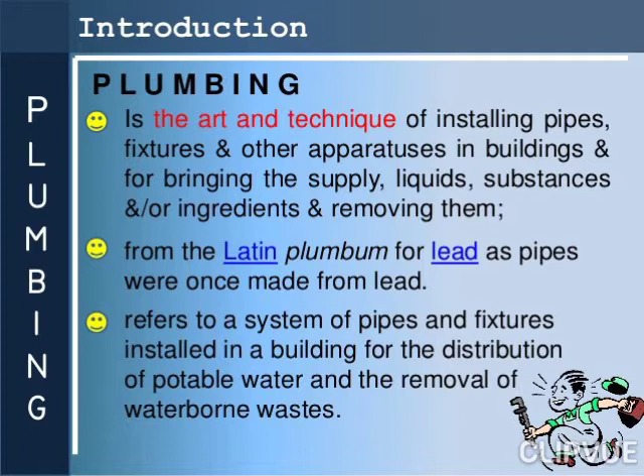From the Latin plumbum, for lead, as pipes were once made from lead, plumbing refers to a system of pipes and fixtures installed in a building for the distribution of potable water and the removal of waterborne wastes.

The plumbing system includes all the potable water supply and distribution pipes, all plumbing fixtures and traps, all sanitary and storm drainage systems, including vent pipes, roof drains, leaders and downspouts, and all building drains and sewers, including their respective joints and connections, devices, receptacles, and appurtenances within the property.

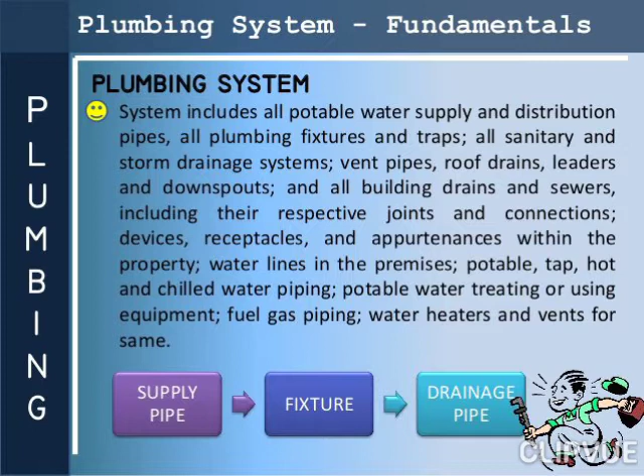Water lines in the premises include potable tap, hot and chilled water piping, potable water treating or using equipment, fuel gas piping, water heaters and vents for the same. So in the block diagram we can see first we need to supply water to the pipe, then it goes to the fixture, and the water will move to the drainage pipe.

Plumbing cycle. Here the supply begins in the water mains and the storage tanks. Distribution occurs through pressure in the piping networks. The use is about the plumbing fixtures. The collection occurs in the gravity piping networks. The disposal occurs in the sanitary and storm sewers.

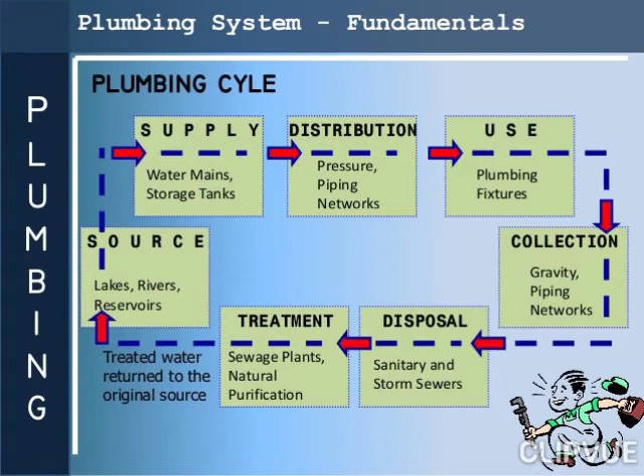The treatment occurs in the sewage plants, natural purification. After that, the treated water is returned to the original source, for example, lakes, rivers, and reservoirs.

Definition: the water supply carries water from the water source, street main, or a pump to the building and to various points in the building at which water is used. Two types of water supply: cold water supply and hot water supply.

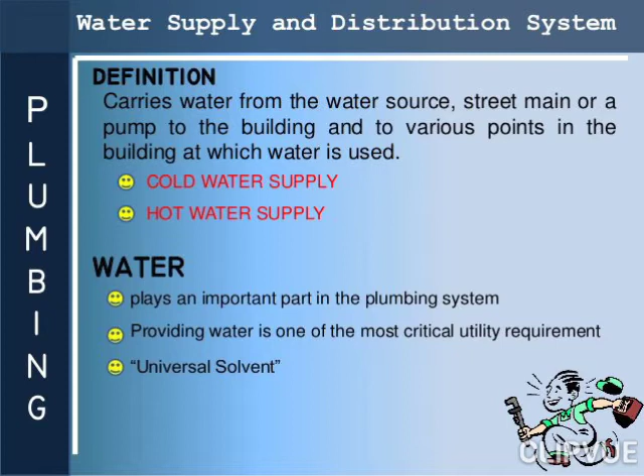Water plays an important part in the plumbing system. Providing water is one of the most critical utility requirements. It is referred to as the universal solvent. The water cycle involves three major stages: evaporation, condensation, and precipitation.

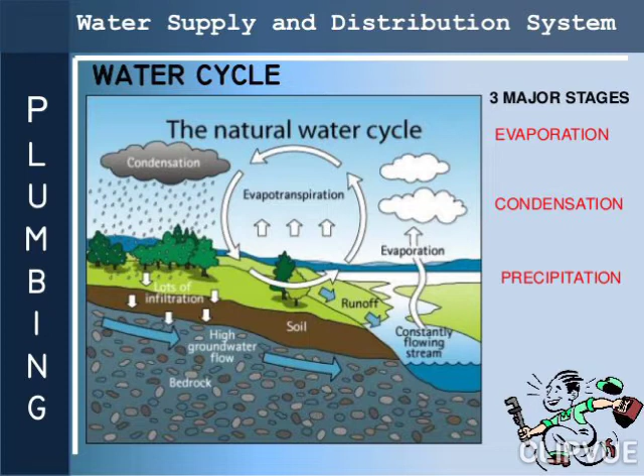Sources of water. It includes rainwater collected from roofs of buildings and special watersheds and stored in cisterns or ponds. Advantage: water is soft and pure and is suitable for the hot water supply system. The disadvantage is that it is only a source during the wet season. The storage becomes a breeding place for mosquitoes. The roofs may not be clean.

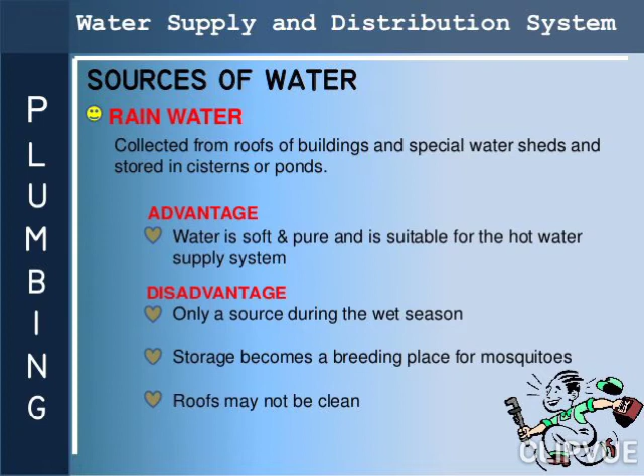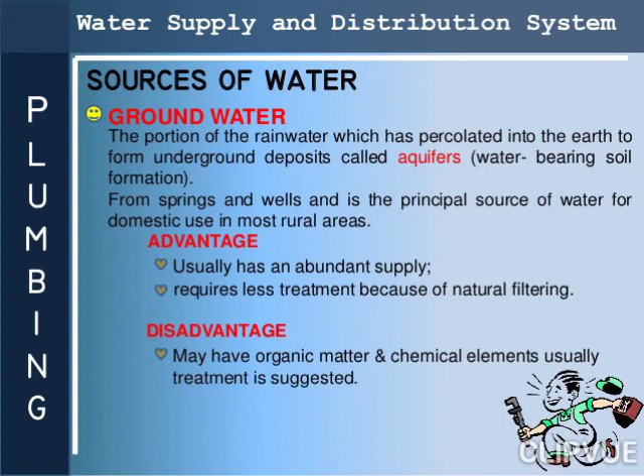Groundwater, the portion of the rainwater which has percolated into the earth to form underground deposits, referred to as aquifers, also termed water-bearing soil formations, from springs and wells, is the principal source of water for domestic use in most rural areas. Advantage: usually has an abundant supply, requires less treatment because of natural filtering. Disadvantage: may have organic matter and chemical elements. Usually treatment is suggested.

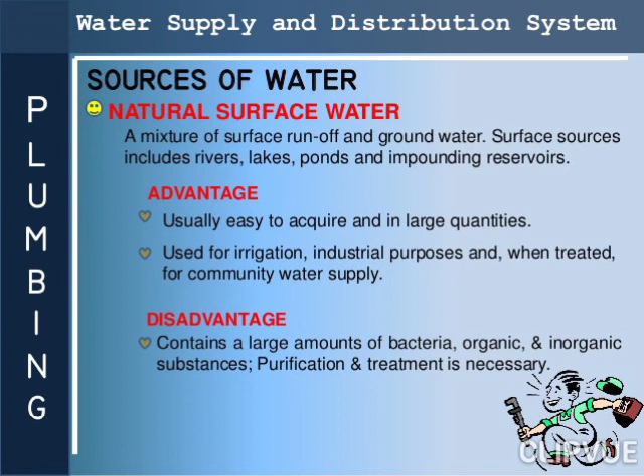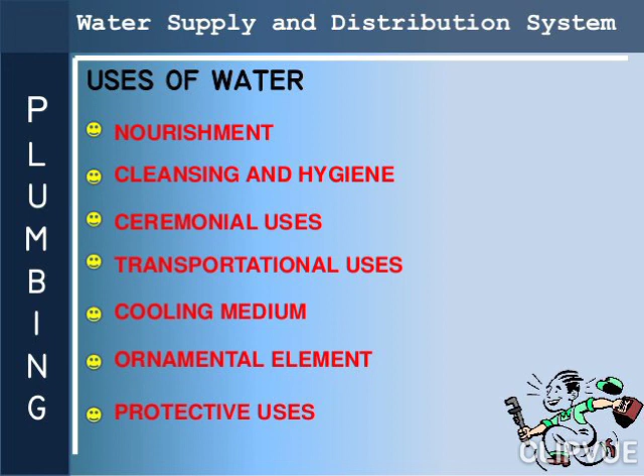Uses of water: nourishment, cleansing and hygiene purposes, ceremonial uses, transportation uses, used as a cooling medium, as an ornamental element and for protective uses.